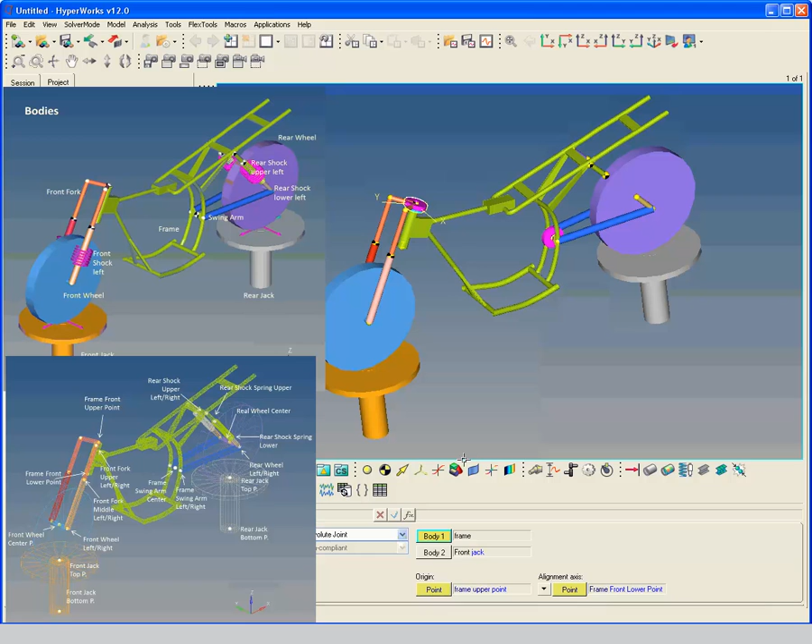Create another revolute joint between swing arm and rear wheel. Select swing arm as first body and rear wheel as second body. Select rear wheel center point as origin point. Align the joint around the global Y direction.

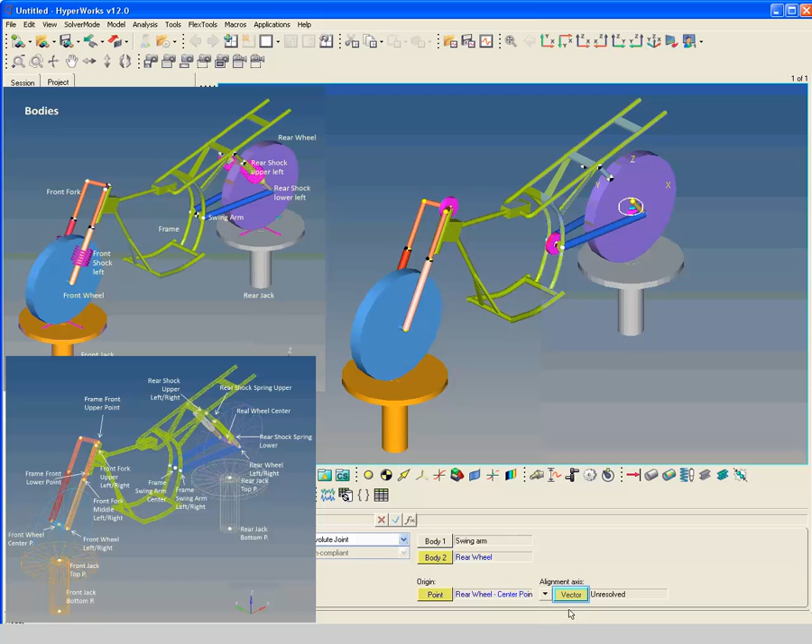Create a revolute joint between frame and rear shock left upper bodies. Select frame as first body, and rear shock left upper as second body. Select rear shock upper left point as origin. Align the joint towards the point rear shock upper right.

Create a revolute joint between frame and rear shock right upper bodies. Select frame as first body and rear shock upper right as second body. Select rear shock upper right point as origin. Align the joint towards the point rear shock upper left point.

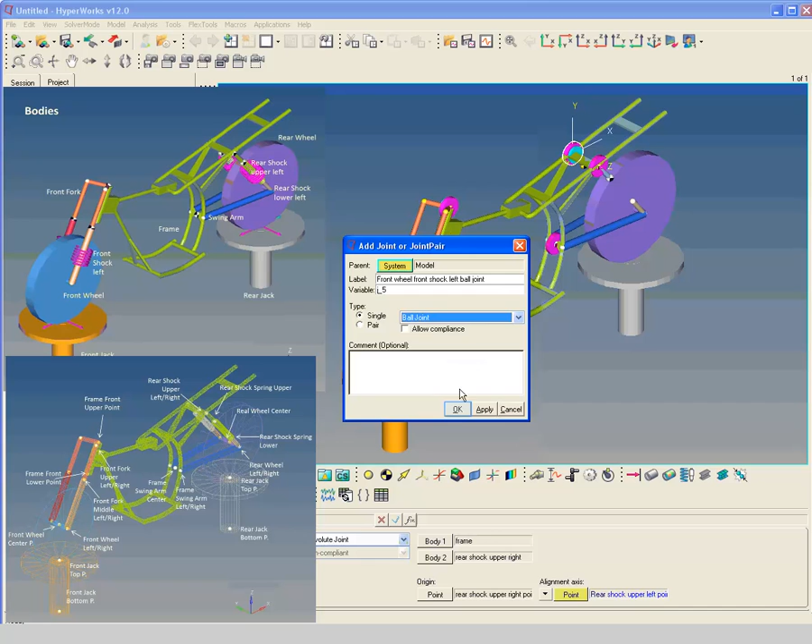Create a ball joint between front wheel and front shock left. Select front wheel as first body, and front shock left as second body. Select the front wheel left point as origin. Repeat the same to create a ball joint between rear wheel and rear shock.

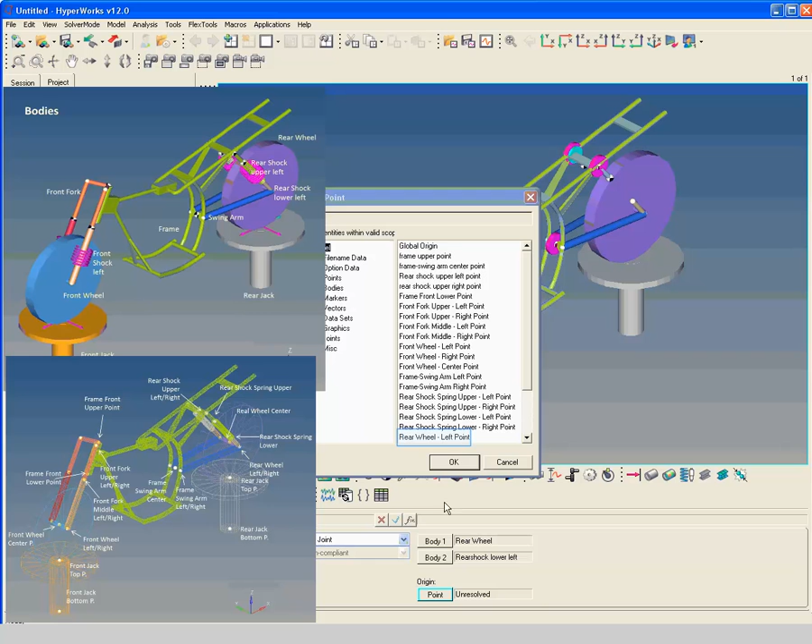Review the model with the joints so far.